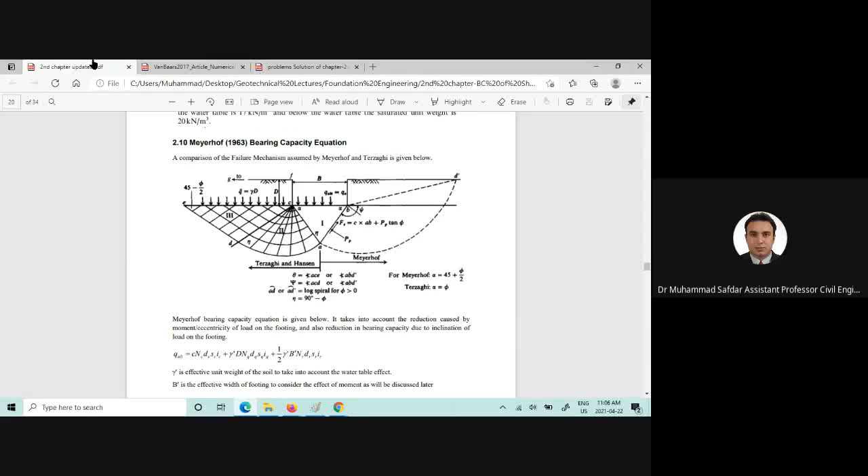About a very important topic related to foundation engineering, which is the Meyerhof bearing capacity equation, or the Meyerhof bearing capacity theory.

We discussed previously in our previous lecture Terzaghi's bearing capacity theory, but I will give you a brief overview of what we discussed in our previous class.

First, we started with understanding the ultimate bearing capacity of soils, which we defined as the least pressure which would cause shear failure in soils.

Then we moved towards understanding various modes of shear failures. For example, general shear failure, local shear failure, and punching shear failure.

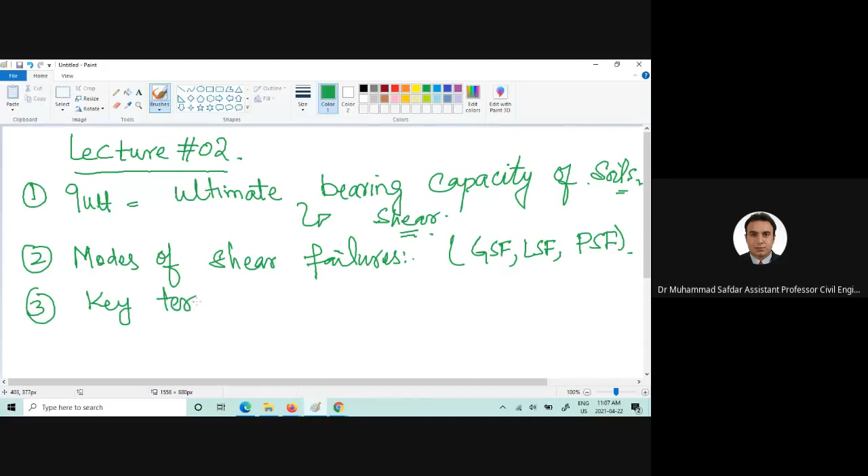Then we moved towards understanding the key terminologies related to the bearing capacity of shallow foundations. For example, we studied the gross pressure intensity, which we defined as weight of superstructure, weight of foundation, and weight of backfill soil, divided by the area of the foundation.

Then we moved towards the net pressure intensity, which was defined as Q gross minus Q, or we can also write that as gamma into D.

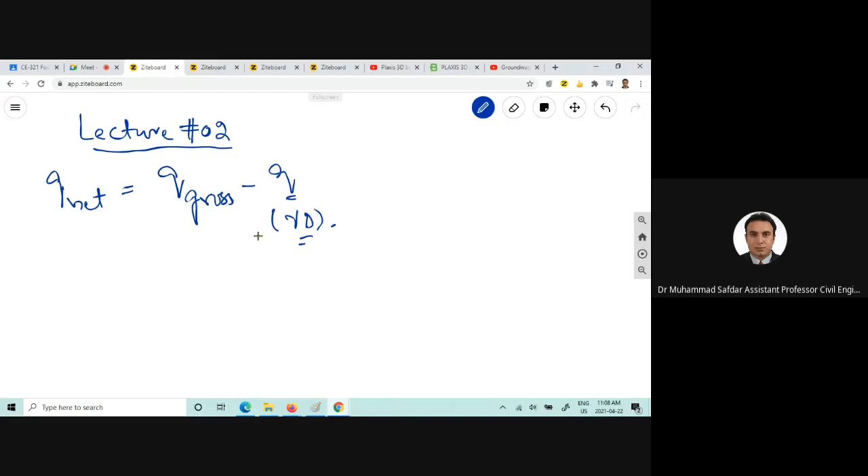Then we defined Q safe, which is basically the ultimate bearing capacity divided by the factor of safety. And factor of safety for shallow foundations, we usually take as 2.5 to 3, based upon various uncertainties in soils and the loading condition.

Then Q allowable was defined as the minimum of Q safe and the Q settlement criteria. This gives us Q allowable.

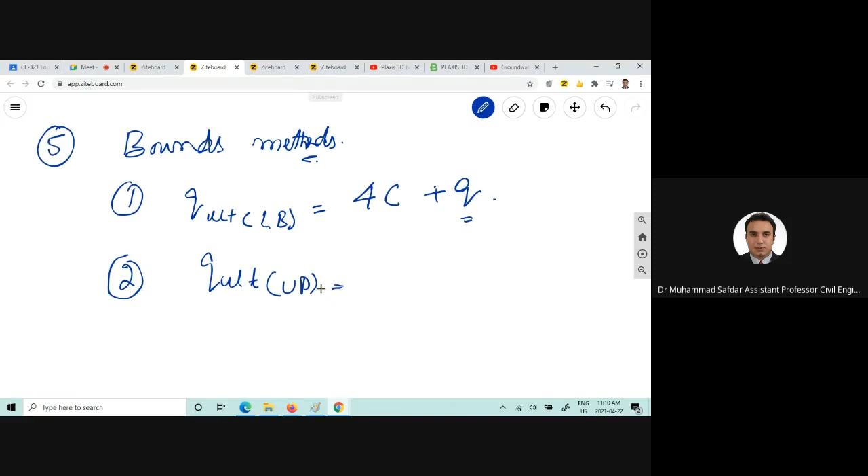After defining the key terminologies, we discussed the bounds method, and we discussed Q ultimate using the lower bound solution, which was 4C plus Q, and for the upper bound solution, it was 6.28C plus Q.

Then we moved towards discussing Terzaghi's bearing capacity theory, and we find out that we can write the Terzaghi's bearing capacity equation.

This part contributes due to the cohesion of soil. This part contributes to the ultimate bearing capacity of soil due to the overburden pressure exerted on top of the footing, and this part contributes due to the weight of soil.

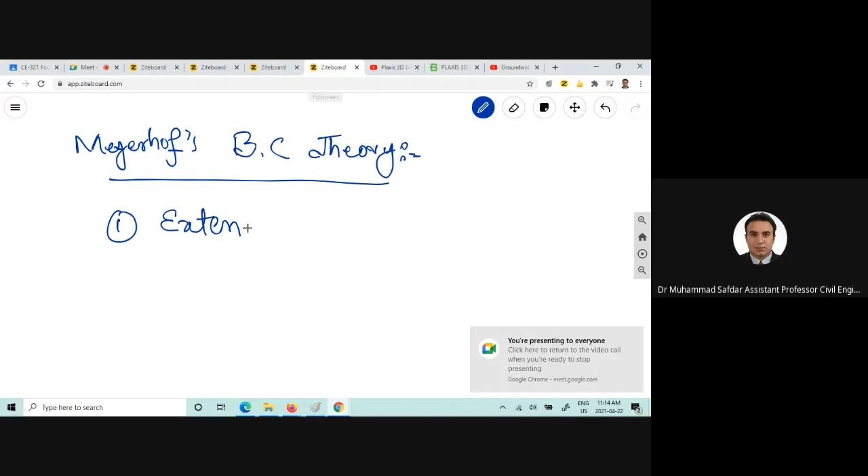Now, this is the failure mechanism for the Meyerhof bearing capacity equation or theory. So we were discussing about the extension. So this is the extension of Terzaghi's bearing capacity theory.

And it accounts for the moment, or eccentricity, and also for the load inclination effect.

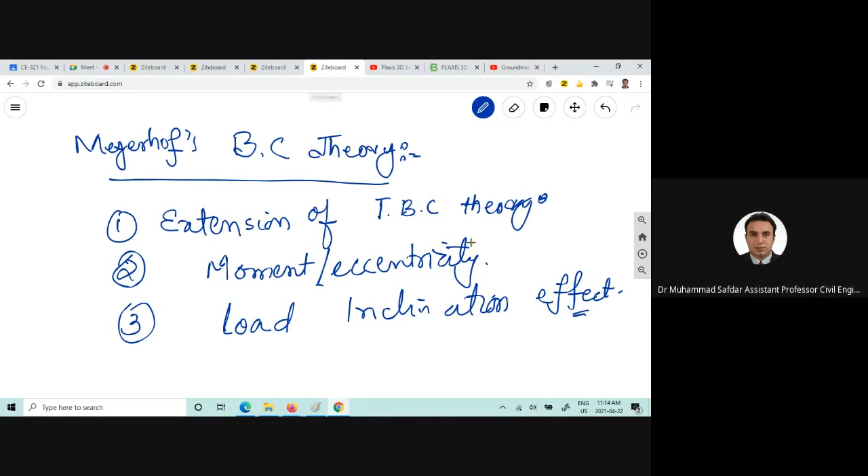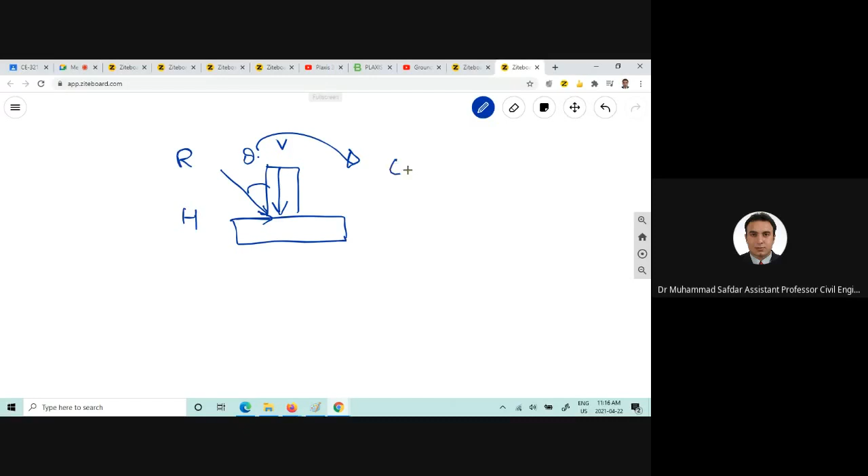Similarly, if there is a vertical load, or we call that V, and we are exerting horizontal load as well onto the foundation, there will be a resultant which will be acting at a certain theta, and that theta is known as the inclination angle. Basically, these moments and the inclination will reduce the bearing capacity of soils. So these effects were taken into account by the Meyerhof bearing capacity theory.

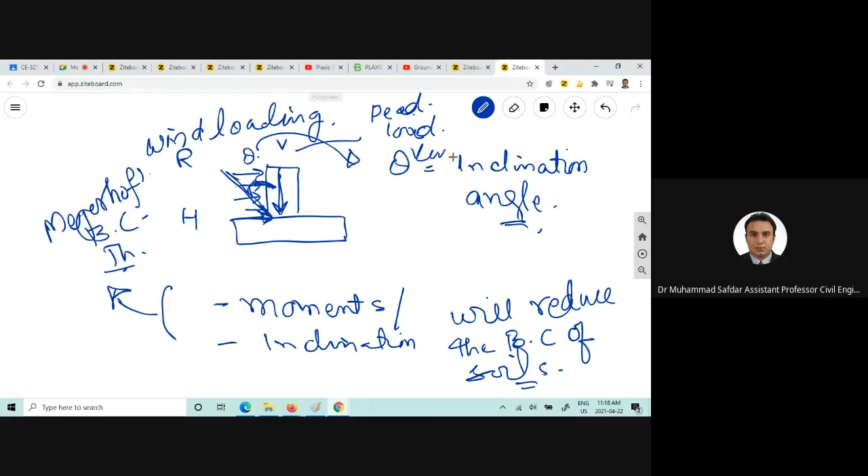Now here we are given the two mechanisms, failure mechanisms.

This one is the Terzaghi's bearing capacity theory failure mechanism, and this one is the Meyerhof bearing capacity theory failure mechanism. Now there are few differences here.

For example, in case of Terzaghi's bearing capacity theory, this alpha was equal to the friction angle, which we usually derive or get from the direct shear test or the triaxial test.

However, in case of the Meyerhof bearing capacity theory derivation, you need to consider that this angle alpha is equal to 45 plus phi by 2.

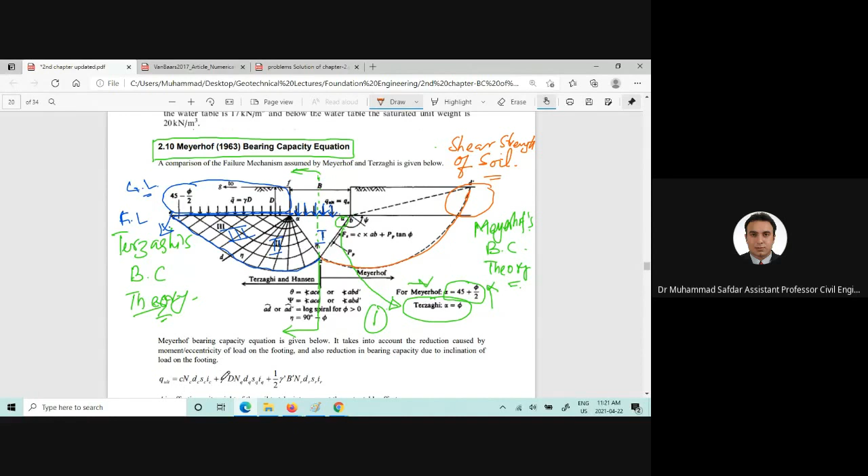Now, this is the bearing capacity equation. Don't get frightened by the length of the equation, because the basic equation remains the same. If you see here, so it's the C and NC, Q and NQ, half gamma B prime into N gamma, and D, S and I.

D represents the depth factors, DC, DQ and D gamma represent depth factors. SC, SQ and S gamma represent the shape factors. IC, IQ and I gamma represent the inclination factor.

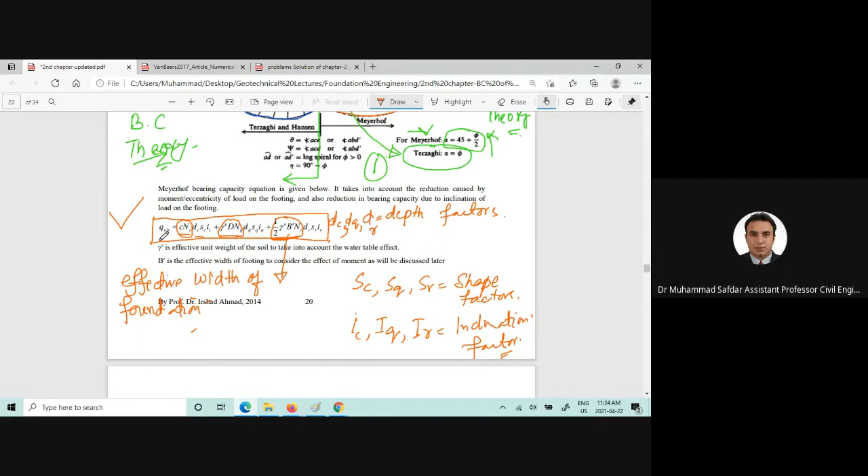And please also note down the equations to find out the bearing capacity factors, the shape factors, and the inclination factors, because we are going to use all these equations somewhere in solving exam problems or the assignments problems and numericals.

Okay, now these are the bearing capacity factors and these are the shape factors, and you can clearly see that Kp is the lateral pressure coefficient in case of the passive condition, and that is equal to this equation. B prime and L prime, these are the effective width of the foundation and effective length of the foundation, which we are going to discuss in the coming few minutes.

Now, depth factors can be found out using these equations, where D is the depth of foundation. These depth factors account for the increased bearing capacity of the foundation at greater depth. Now, additional strength is provided by the soils above the level of the foundation.

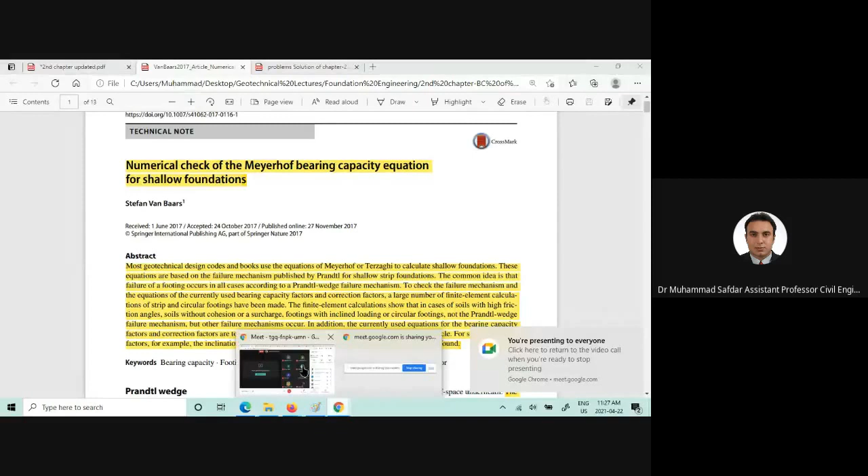Whenever you do research, whenever you perform a model test, for example, if you are performing a frame structure, that would be related to structural engineering, and we bring it to the shaking table, and then we investigate the dynamic effect and how much damage that structure experiences, and then we write a research paper and comment on what happened at what cyclic loading or frequency levels. Similarly, in bearing capacity equation derivation, there is a history of how it started and who started the derivations and the failure mechanism. So here is a technical note. First of all, this is a technical note, which is a short paper compared to an extensive paper. Here is the journal where it was submitted, and all the information: it was submitted and accepted in 2017. Now here is the title of the research paper.

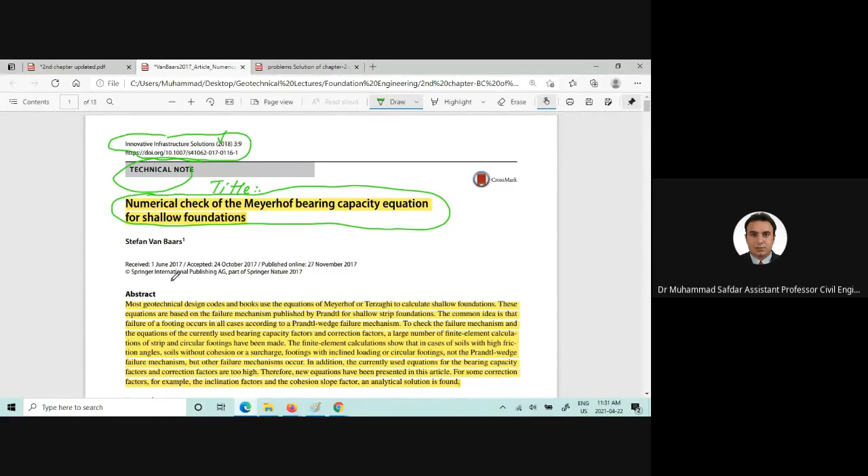The reason I am sharing this info is first related to the Meyerhof bearing capacity equations, and it's helpful for enhancing your knowledge on bearing capacity equations. The other objective is for those interested in performing numerical studies on shallow foundations, or even physical model studies where we test models and then do numerical simulation as well. It can also help you find scholarships in geotechnical engineering, because if you do your FYP and pursue a masters in geotechnical engineering, international supervisors look at your CV very seriously since you've done research during undergrad in that field. That's why I'm sharing this.

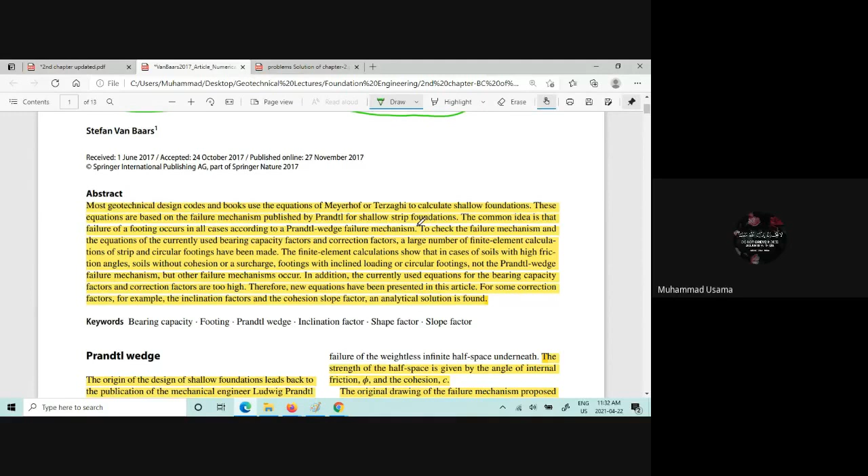The common idea is that failure of a footing occurs in all cases according to the Prandtl-wedge failure mechanism. Now you can clearly see that Prandtl was the researcher who started research on strip foundations. And if you remember, in case of Terzaghi's bearing capacity failure mechanism...

We were told that this part is the elastic wedge, and then there is a radial shear zone. In fact, Terzaghi named that radial shear zone also as the Prandtl zone, because he was so impressed by his work that he dedicated this zone to Prandtl.

To check the failure mechanism and the equations of the currently used bearing capacity factors and correction factors, a large number of finite element calculations of strip and circular footings have been made.

Now, finite element calculations - so it's an FEM software, and the name of that software is Plaxis, available in 2D and 3D, where you can perform bearing capacity analysis for shallow and deep foundations, and which is used in North America in consultancy firms as well, as I mentioned earlier related to GeoStudio. That is another software widely used in the industry.

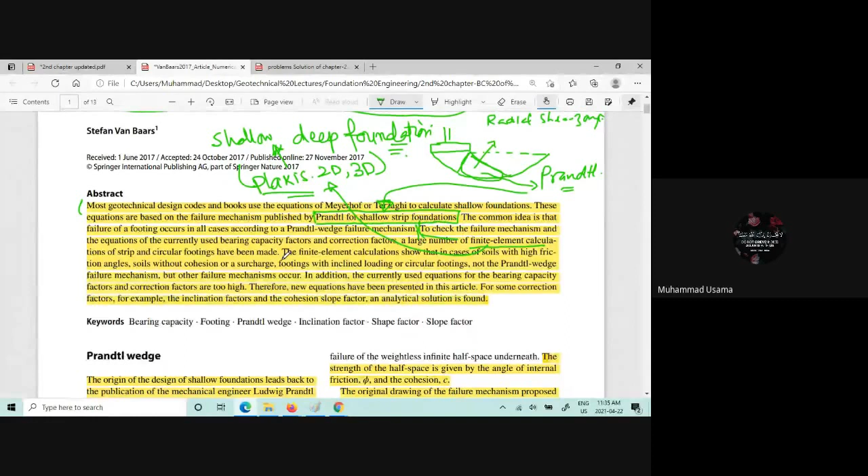The finite element calculations show that in case of soil with high friction angles, soil without cohesion, surcharged footings with inclined loading, or circular footing, not the Prandtl-wedge failure mechanism but other failure mechanisms occur. In addition, the currently used equations for the bearing capacity factors and correction factors are too high. Therefore, new equations have been presented in this article. For some correction factors, like the inclination factors and the cohesion slope factor, an analytical solution is found.

Okay, thank you. Now, this research is conducted in 2017, so fairly recent I would call it, and they are evaluating strip foundations and circular footings here. They are working using FEM analysis, and commenting on the very fundamental concept of the Prandtl failure mechanism for cohesive and cohesionless soils. So that's how the research is done.

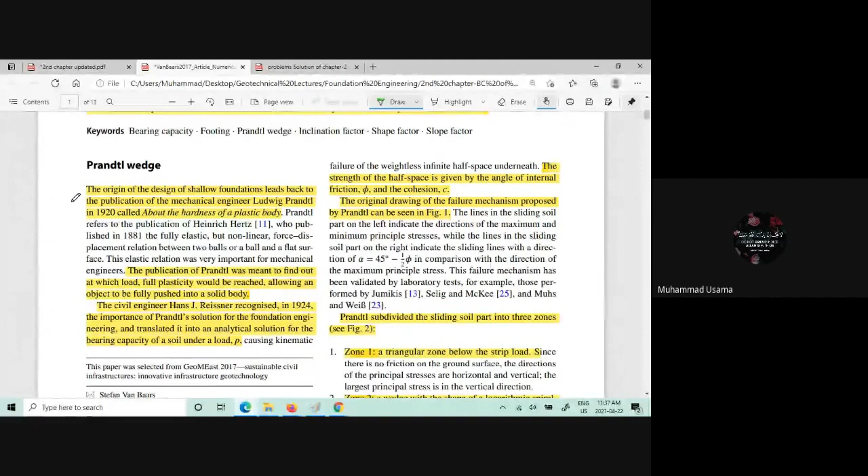Now the Prandtl wedge, please, the origin. The origin of the design of shallow foundation leads back to the publication of the mechanical engineer Ludwig Prandtl in 1920, called 'About the Hardness of a Plastic Body.'

The publication of Prandtl was meant to find out at which load full plasticity would be reached, allowing an object to be fully pushed into a solid body. The civil engineer Hans J. Reissner recognized in 1924 the importance of the Prandtl solution for foundation engineering and translated it into an analytical solution for the bearing capacity of a soil under a load P.

Thank you very much, Usama. Now you can see there is another researcher who came up here, and he also presented the analytical solution for the bearing capacity of soil under a load P. He also considered the strength of the soil as the angle of internal friction phi and cohesion C.

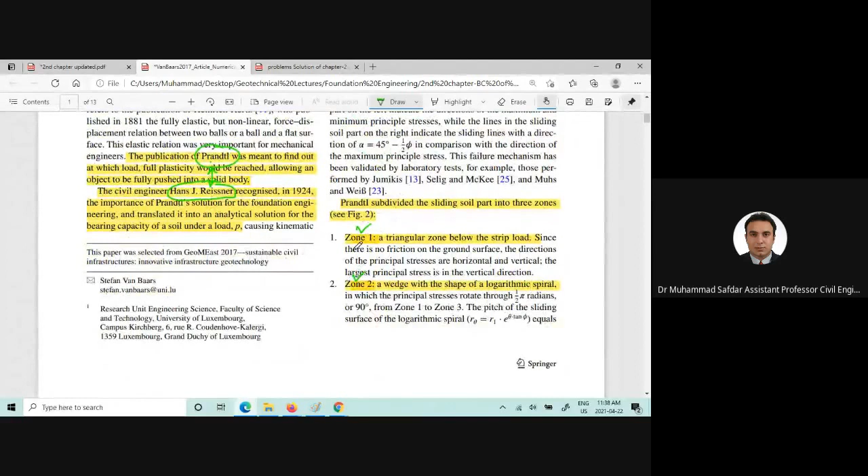The original drawing of the failure mechanism proposed by Prandtl can be seen in the figure, showing those three zones: the elastic zone, and the Prandtl zone or radial shear zone.

This is the failure mechanism proposed by Prandtl, and how he derived the equation for the ultimate bearing capacity. In fact, it was Terzaghi who did that.

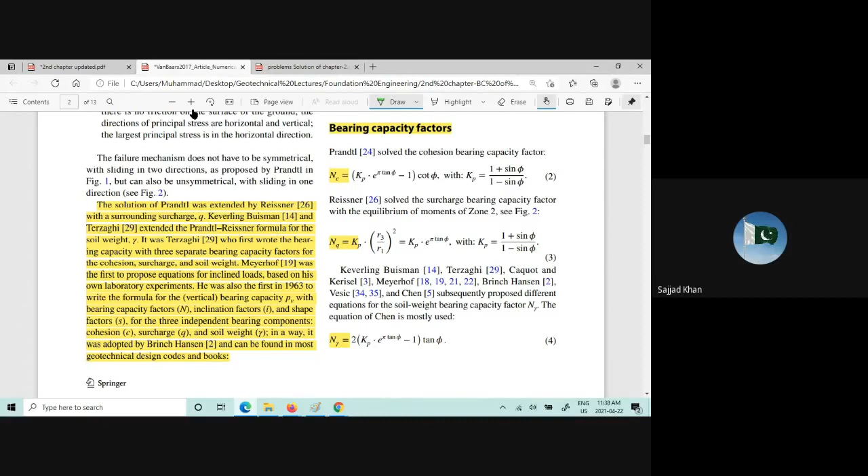The solution of Prandtl was extended by Reissner with surrounding surcharge Q. Keverling Buisman and Terzaghi extended the Prandtl-Reissner formula for the soil weight gamma. It was Terzaghi who first wrote the bearing capacity with 3 separate bearing capacity factors for cohesion, surcharge, and soil weight.

Now for today's lecture we go to Meyerhof. He was the first to propose an equation for inclined load based on his own laboratory experiments. He was also the first, in 1963, to write the formula for vertical bearing capacity PV with bearing capacity factor N, inclination factor I, and shape factor S for the 3 independent components cohesion C, surcharge Q, and soil weight gamma. This was later adopted by Brinch Hansen and can be found in most geotechnical design codes and books.

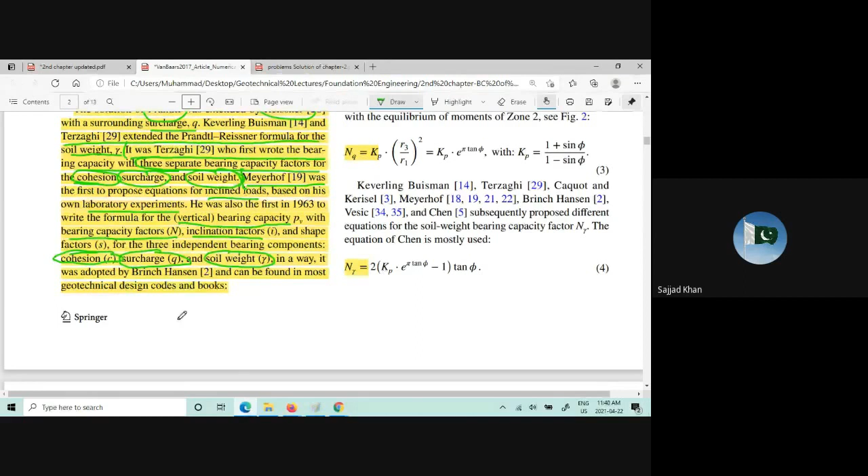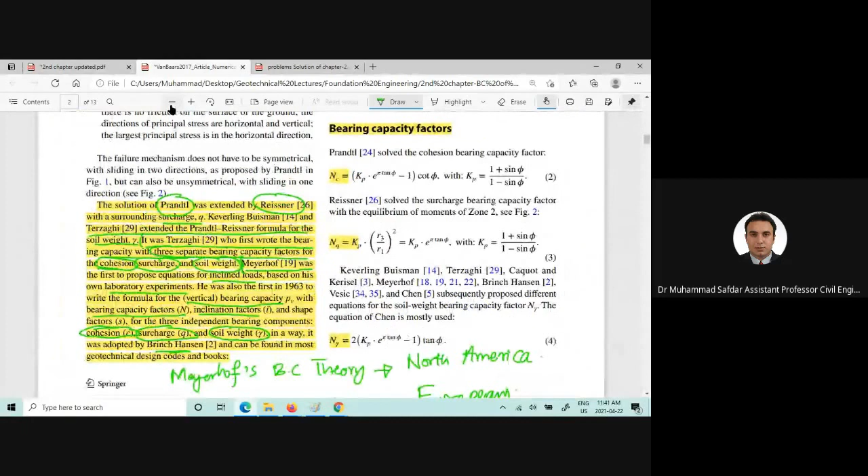Meyerhof's bearing capacity theory is used, or known by his name, in North America. However, Brinch Hansen, in the 1960s and 70s, proposed modifications for sloping ground. So in Europe they call it Hansen's equation or bearing capacity theory, because he modified it. But the concept behind these derivations remains the same: it started from Prandtl, Reissner, Terzaghi, Meyerhof, and then Brinch Hansen.

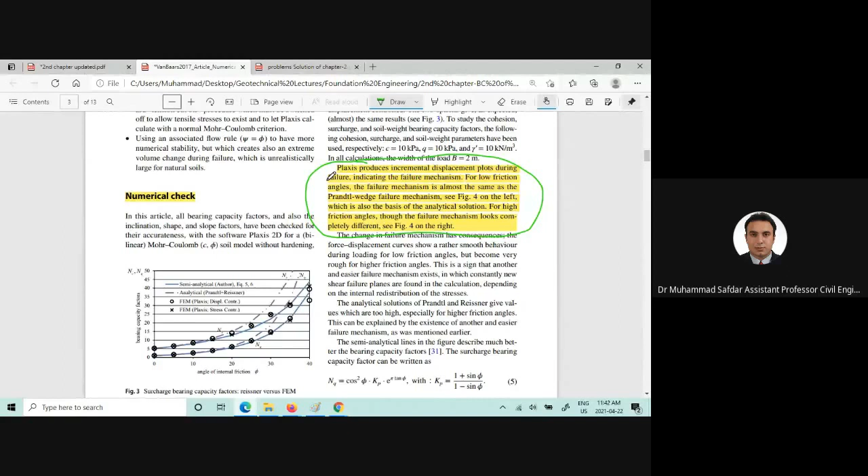There is also Vesic for the case of sloping foundations, who proposed different bearing capacity factors. Coming back to the research paper, he used these bearing capacity factors and compared them with Plaxis software. He did the numerical check, plotted and investigated the load-displacement curves, and plotted the angle of internal friction against the bearing capacity factors to see how increasing friction angle affects them.

You can clearly see that three different types of zones appear if you perform this analysis using Plaxis 2D software, which is very powerful for anyone interested in geotechnical engineering.

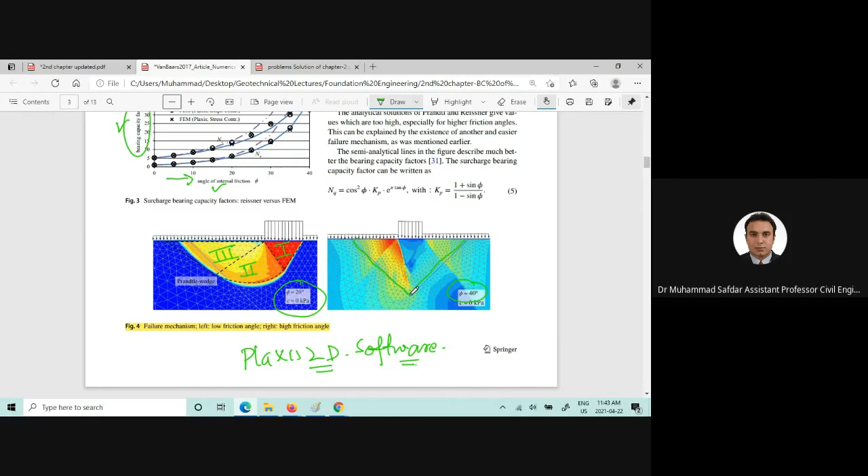The researcher shows that for phi equal to 20 degrees and cohesion equal to 0 kilopascal, you see a clear Prandtl wedge failure mechanism. However, when the soil density increases, the friction angle increases, and you only see an elastic wedge in the case of high frictional soil.

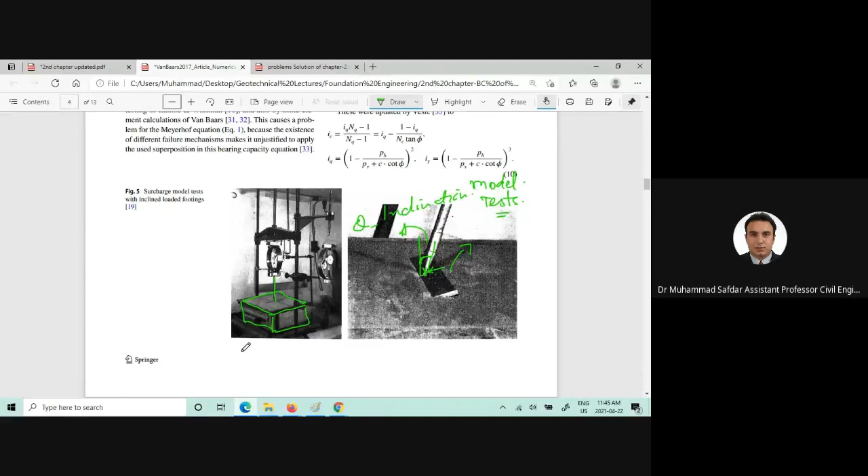First of all you learn a lot of things, because if you work on bearing capacity you can also contribute to design. If you want to prepare or fabricate physical models, people will notice that this person is doing research in geotechnical engineering, which is in itself a unique field, currently at the Department of Civil Engineering.

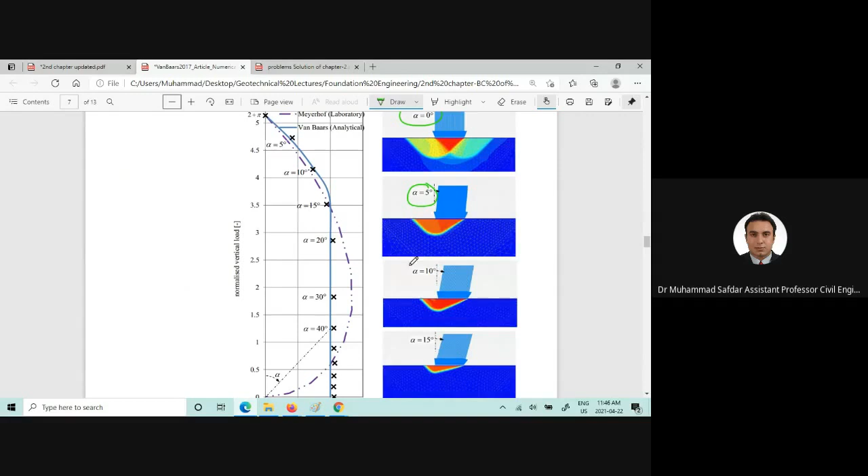That's related to the inclination, and for inclined loads, Mohr circles, we are going to use these concepts, and the shape factors as well, different shapes of foundations. If the inclination angle is 0 degree, 5 degrees, we can prepare these models. I can support financially if you want to prepare these models. That's also possible, you don't need to worry about that.

Shape factors, you will use these shape factors, and then you will notice how the failure mechanism for circular areas, for a rectangular footing, for a square footing will change beneath the foundation. You can clearly see significant stresses are applied near the foundation, and as you move below the foundation, the stress intensity decreases. Also, the friction angle characteristics: if friction angle is 0, for cohesive soils, and if we have purely frictional soils or the internal friction angle is very high, then how the failure mechanism would occur.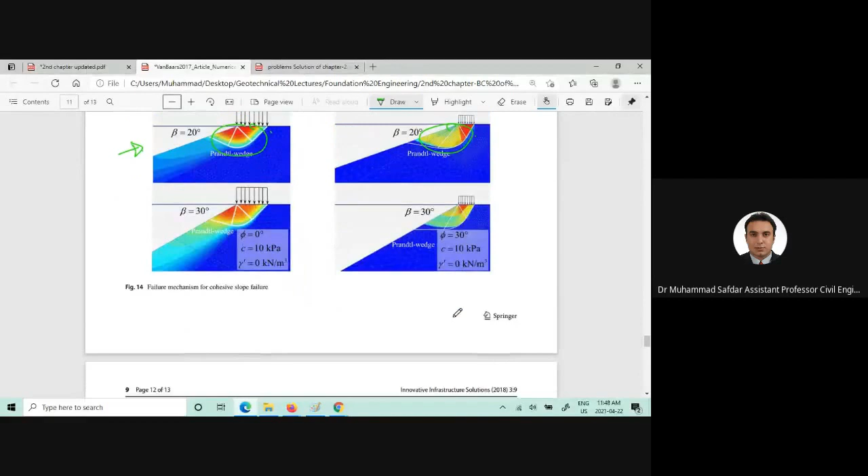Okay, the third volunteer. Who is the third volunteer? He or she needs to help me with the conclusions, please. Yes sir, name please. Amna Khan. Okay, thank you, please start with the conclusions.

A large number of finite element calculations of strip and circular footing on homogeneous soil have been made to check the failure mechanism and to check the currently used equations for the bearing capacity factors and the equations for the corresponding inclination factors and shape factors. Okay, so these are the factors which were investigated during this study. And slope factors: the finite element calculations show that the currently used bearing capacity factors are too high.

The most important reason for this is that for natural soil, the dilatancy angle is much lower than the friction angle. The finite element calculations also show that not in all cases does a Prandtl-wedge failure mechanism occur. In fact, in many cases, other failure mechanisms occur. This is one of the reasons why most of the currently used inclination, shape, and slope factors are not correct.

In many cases, the currently used correction factors are too high, so unsafe. Therefore, based on the finite element calculations, new equations have been presented in this article for some correction factors, for example the inclination factors and the cohesion slope factors, and an analytical solution is found.

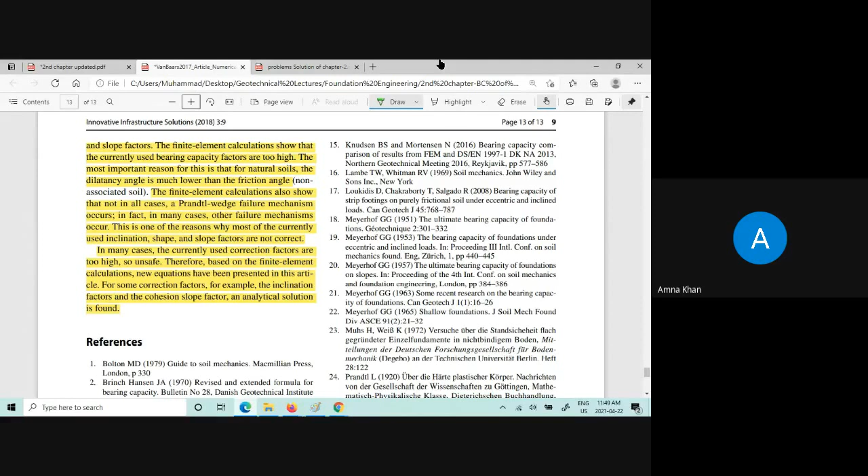Okay, thank you very much Amna. Now, these are the conclusions obtained based upon the numerical analysis, numerical modeling, and the physical model tests. Then you compare the data and you come up with the conclusion that you won't see the Prandtl-type mechanism for each and every soil, so there would be a difference. Now, how much that difference would occur, that is part of the research which we will do.

That is one project. There is another project which comes into my mind, which I also discussed with the chairman sahab, that I want to build a few geotechnical or soil mechanics demonstration models for the soil mechanics lab, and that would be a huge contribution because you are adding value to the soil mechanics lab. So this is one example.

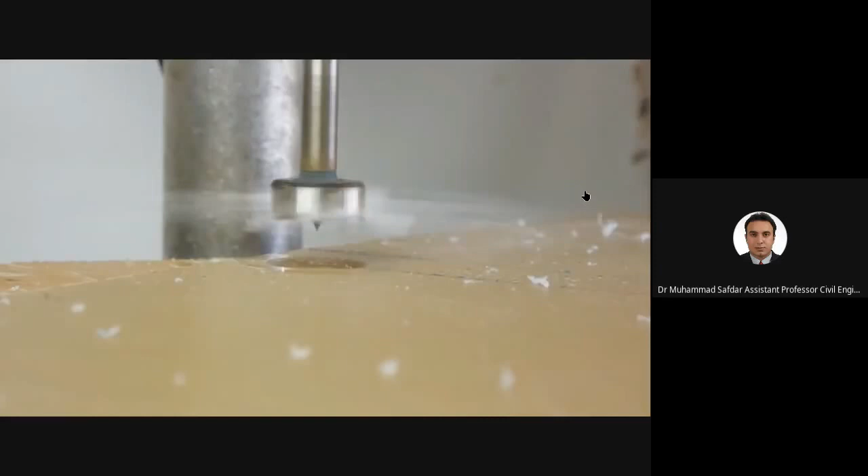Related to the flow lines and flow net. I will provide the finances for these models. Can you hear the voice in the video or not? No sir, no sir. Okay, now it stopped, but how about the earlier one?

So you studied about flow nets in Geotech 1. Now you got seniors, and now you need to contribute to the department. So if you remember, the flow lines occurred and the equipotential lines, you can draw them, and the water levels on the upstream side and the downstream side.

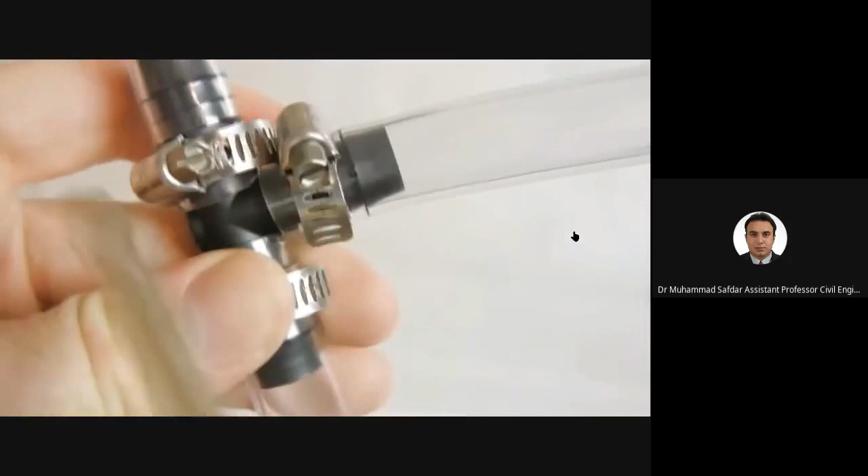Now if we place the sand there, and if we saturate it and add a kind of color there, then the flow lines or the water particles will move from the upstream side towards the downstream side. So we can use the glue there, the drainage and the inlet and outlet valves. Let's put the water inside. That tank is in acrylic glass.

You can put those potassium permanganates there, and you increase the head of the water on the upstream side. That differential head difference will cause the flow to occur from the upstream side towards the downstream side.

This is only one demonstration model which we will place at the soil mechanics lab. There are dam failure models, liquefaction models, and bearing capacity models as well. We can come up with approximately 7 to 10 models, and in your thesis you are going to explain the basic theory and mechanism occurring in this model.

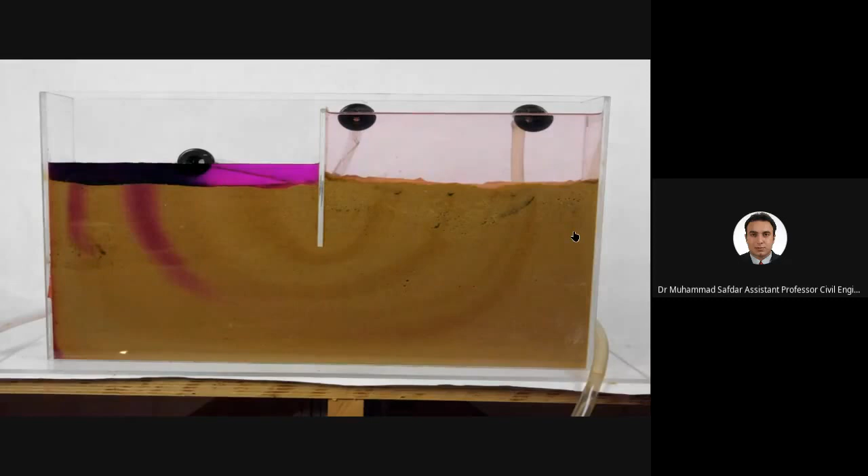This will refresh your concept related to geotechnical engineering, particularly for those students who have interest in geotechnical engineering. It will showcase your talent in front of the chairman, the honorable dean, and the vice chancellor, showing that we have made these models which cover the core concepts related to geotechnical engineering.

Furthermore, you can also send these videos to international professors and supervisors. I saw somewhere a video of the bearing capacity demonstration, but it went away. I thought maybe I'll find it so I can show you - that was another type of model I was expecting.

This is the kind of soil improvement technique. Oh no, you see those ads, funny ads.

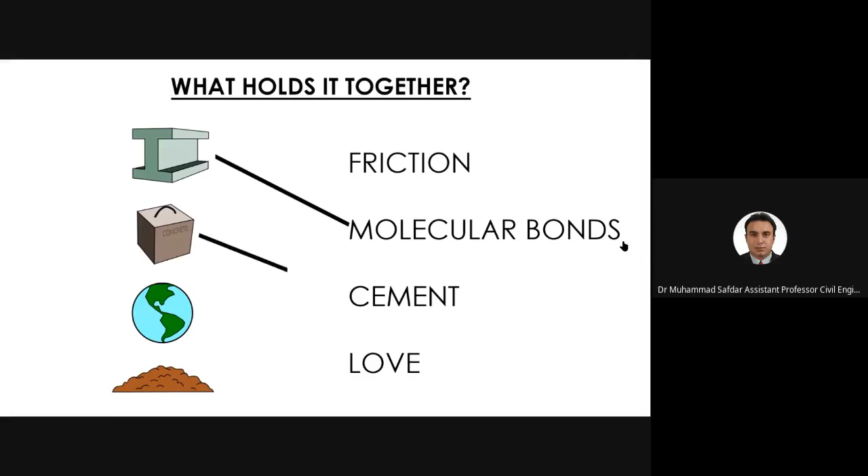If you load the soil, you will see the shear failure there. And if you provide some confinement, then it will hold.

Now you can see that if we have reinforced these soils with different layers like geotextiles and geogrids - there is also a model for the geogrid and there is also a model for the geotextiles.

You can make the videos, take the pictures, and include them in your final year project. Then you can present these videos during the FYP presentations and progress presentations, which will definitely help.

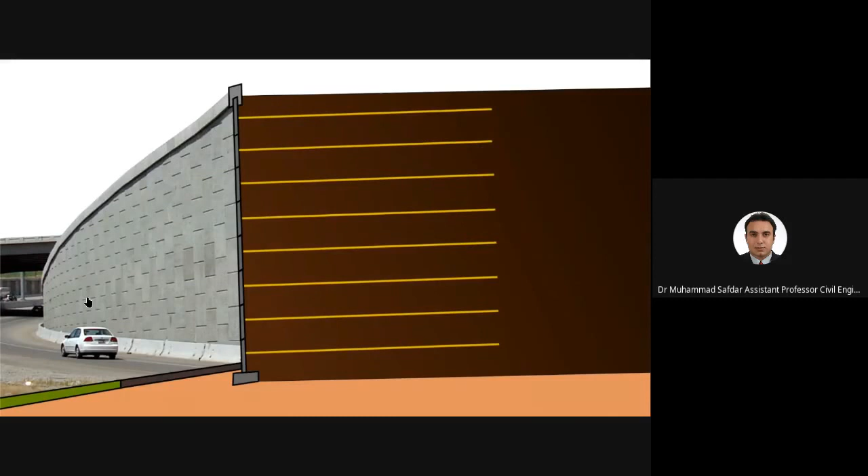Mechanically stabilized walls are there - in retaining walls these concepts are used. These type of mechanically stabilized walls which are located on motorways and highways are stabilized using the same concepts. All this information you can include in your thesis.

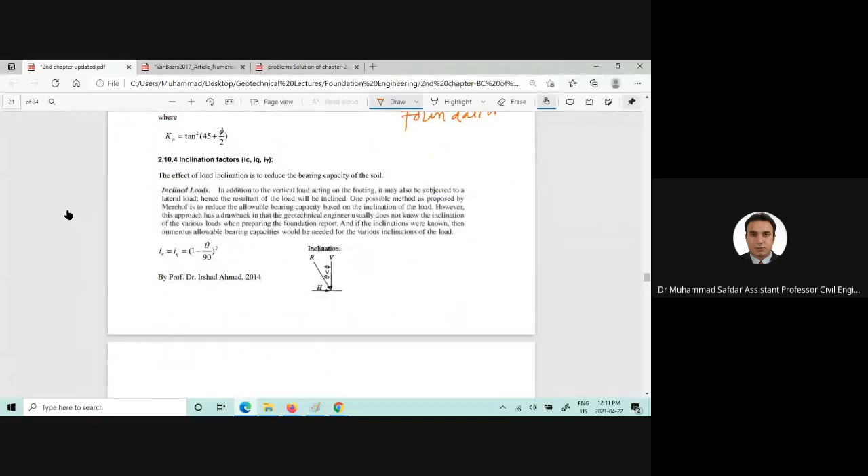That was related to the Meyerhof bearing capacity equation, how important it is, how the different depth factors, shape factors, and inclination factors are derived based upon research. These are the inclination factors, and how we can find out the inclination factors.

The difference between the Terzaghi's and Meyerhof bearing capacity approach: as we discussed, the shear failure mechanism is different. The introduction of Sq, which is the shape factor due to the surcharge, was introduced by Meyerhof.

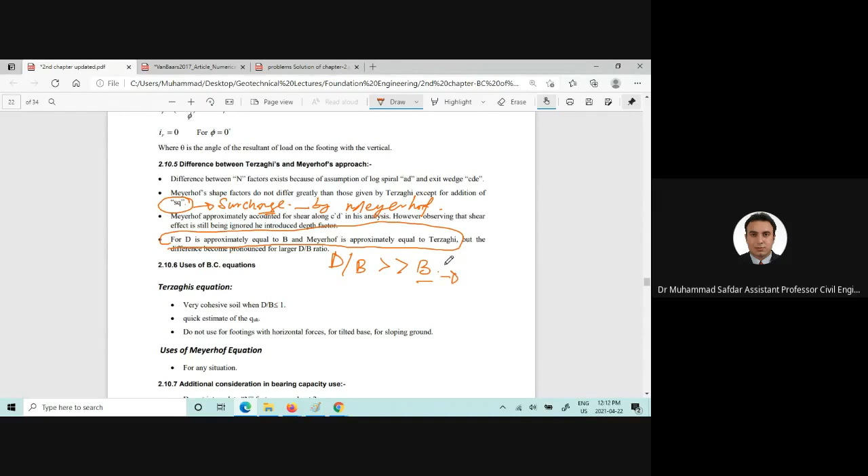For depth of the footing, if it is approximately equal to B, the Meyerhof and Terzaghi bearing capacity will give identical results. But if D by B is greater than B, then the results of both these theories would be different.

Terzaghi's equation is preferable in case of cohesive soil where we are having shallow foundations, and it can give us a quick estimate. As we know, horizontal forces, tilted bases, and sloping ground scenarios are not suitable for finding the bearing capacity using the Terzaghi's bearing capacity equation. However, in case of the Meyerhof equation, we can use it for any situation or scenario.

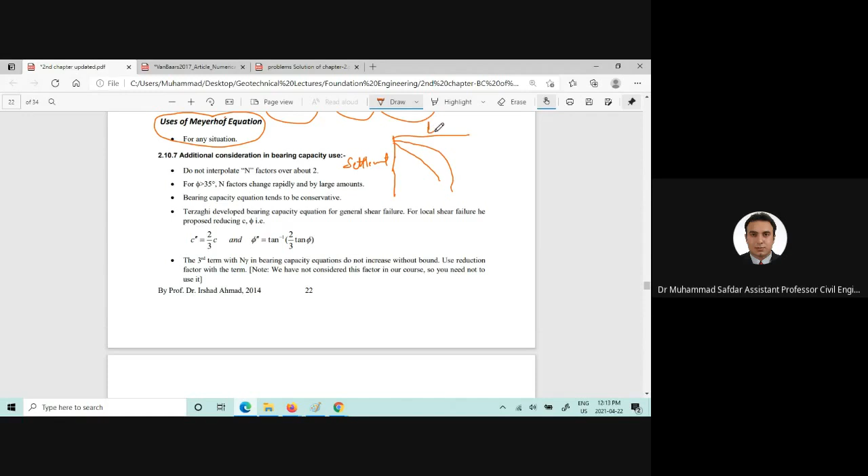Terzaghi bearing capacity uses the general shear failure mode of failure. In case of local shear failure, there are a few additional considerations: cohesion should be reduced by a factor of 2/3, and you can also multiply 2/3 into the tangent phi in order to account for local shear failure.

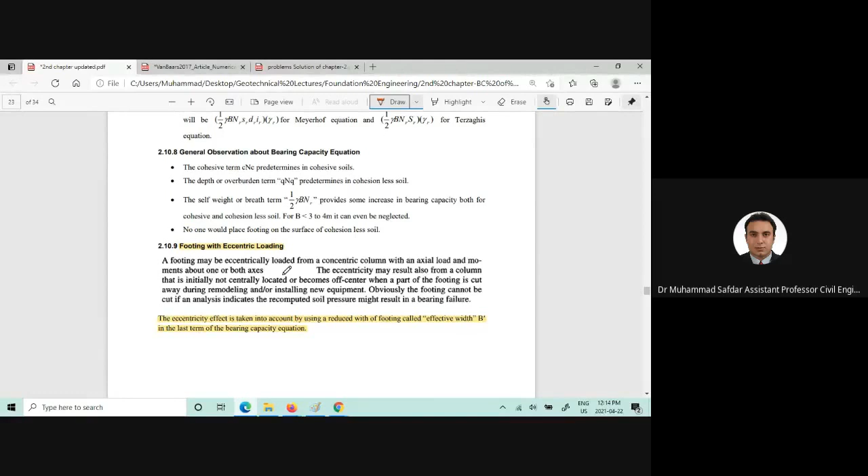Now, general observations about the bearing capacity equation. As we already discussed, the cNc part is predominant in cohesive soils, and the overburden part, Nq, is predominant in cohesion-less soils, like this one for clays and this one for sands. Self-weight of the soil is predominant for both cohesive and cohesion-less soils, and for B less than 3 to 4 meters, it can be neglected.

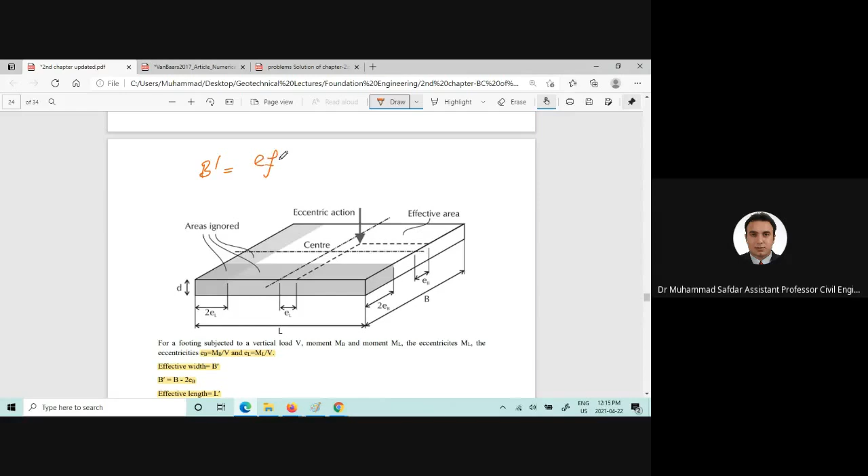Now there is an interesting concept which we touched on a little bit, the use of B prime, which is the effective width of foundation. For example, we are given with the foundation...

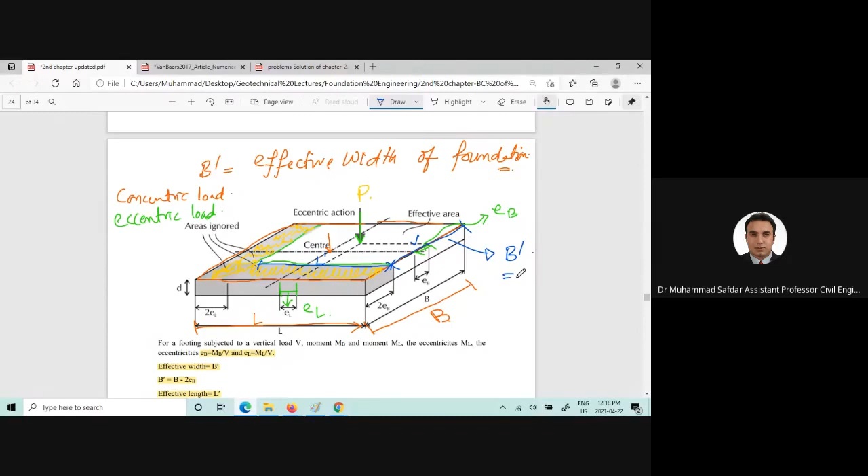Now we will come up with a new dimension of L prime. So this would be L prime, and let's suppose this one is B prime. Now if you want to find out EB, which is the eccentricity along the width of the foundation, we divide the moment by the vertical load, so this will give us the eccentricity in the direction of the width of the foundation. This would be the moment along the length of the foundation divided by the vertical load, which gives us the eccentricity if the vertical load is given.

Now if you want to find out B prime, that would be equal to B minus 2EB, and if you want to find out the effective length, it would be L minus 2EL, and I think we need to correct this equation in the notes. Then we come up with the effective area, and we can find out AF equals B prime into L prime.

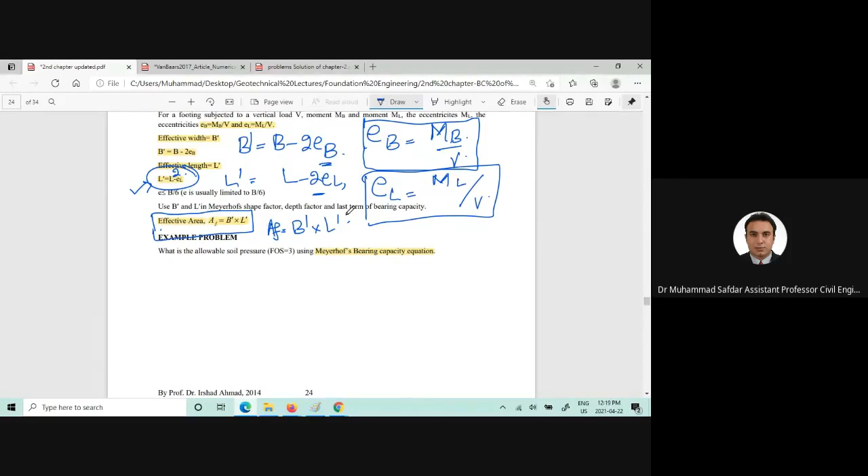We will solve these problems in the coming lecture. There is a separate lecture on solving the numericals where we are going to use all these equations, and I hope you will understand the concepts more clearly. Now, if an eccentric load is applied onto the foundation...

There is a load applied, and let me draw that. So this is the center of the foundation, and the resultant vertical load P is applied at a certain eccentricity E.

Then what would happen? Moments would be applied in this direction, and the pressures beneath the foundation would have a distribution something like that, which will give us Q prime and Q double prime, where Q prime is equal to the largest bearing pressure and Q double prime is equal to the lowest bearing pressure.

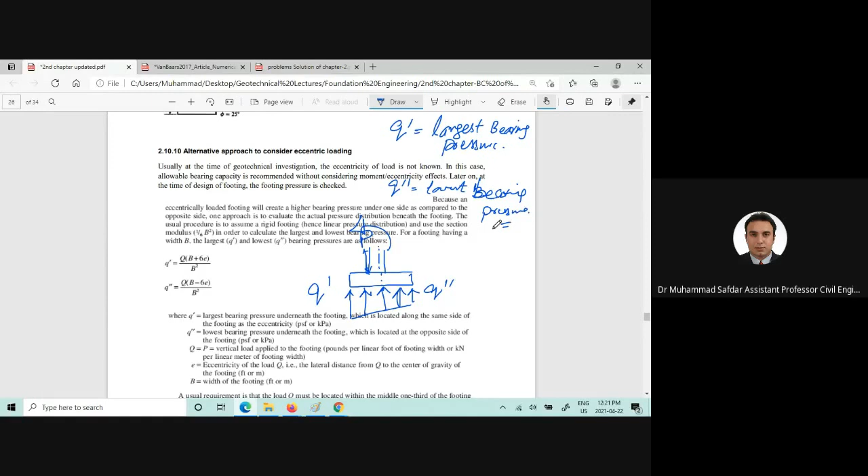E is the eccentricity from the central loading, and the questions and answers will be given a separate time at the end of this lecture. Please hold on to these questions. Now Q prime, Q double prime, Q, E and B are given here as well.

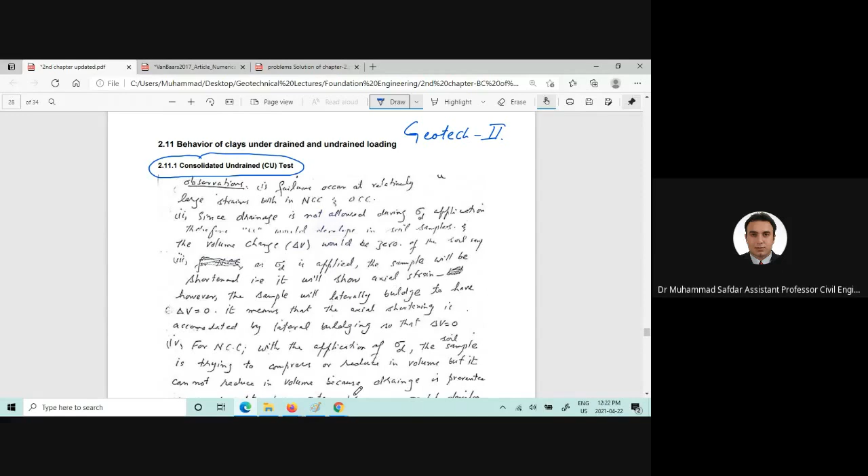Now, for the behavior of clays, for example drained and undrained loading, these concepts are related to Geotech 2. Now, for drained loading or consolidated undrained behavior, for normally consolidated clays and over-consolidated clays, what do you remember from the drained consolidated undrained behavior for normally consolidated clay and over-consolidated clay? Any thoughts related to the CU test on normally consolidated clay and over-consolidated clay would be appreciated.

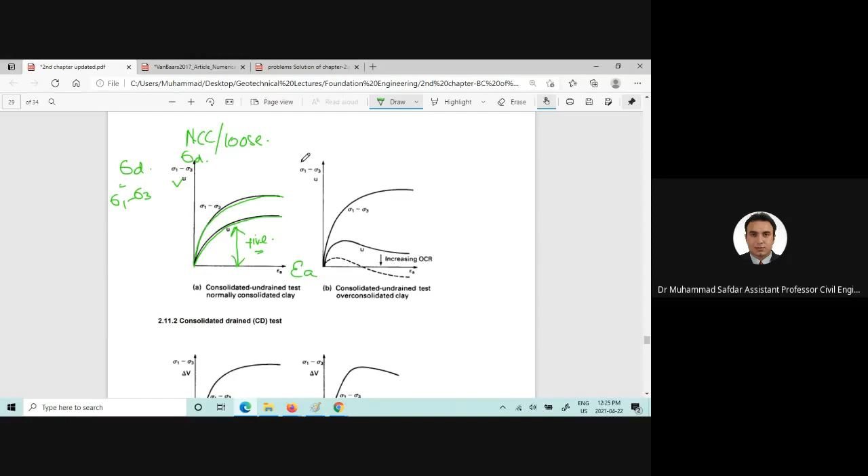Now if you want to draw for over consolidated clay or dense sands, this would be sigma D or epsilon A. The stress strain graph should look a little bit higher than the previous one, because that was for loose sand. And then there is a positive pore water pressure, then a decreasing trend will start with the dense sand, and after that there will be another.

For example, OCR is equal to 1, OCR is equal to 2, or OCR is equal to 3. This is the positive pore water pressure, and here we are getting the negative excess pore water pressure. In case of increasing OCR, the trend will go from compressive to dilative.

If you want to draw the sigma D and epsilon A curve in consolidated drained condition, we are now talking about volumetric changes. The stress strain graph will look somewhat like this, and it should go beyond that because it's for normally consolidated clay or loose sand, but here only the concept of dilatancy or volumetric change is shown, and we can clearly see that the peak in the dense sands occurs at small strains.

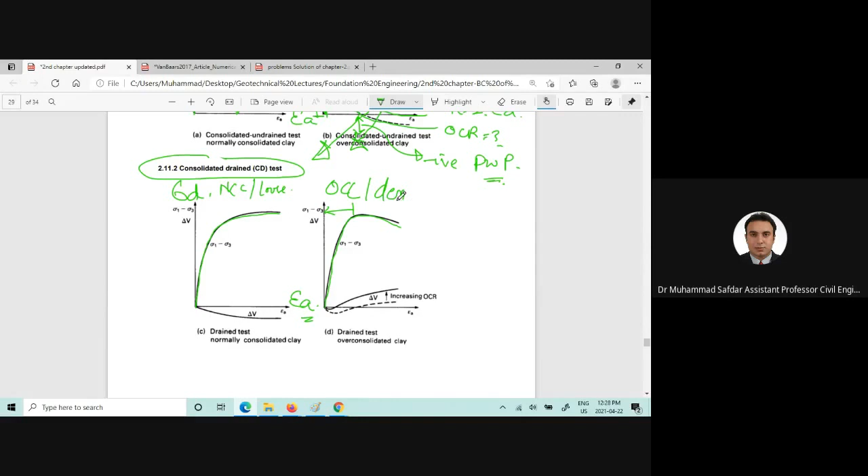For OC clay or over consolidated clays and dense sands, the observations were made, which were discussed in good detail in class as well and in the exams. We also touched a little bit about the total stress analysis and the effective stress analysis.

Now in case of sands, we do total stress analysis or effective stress analysis. We do effective stress analysis, and that is also known as the long-term analysis, and that is also known as the drained analysis. Now in clays we do...

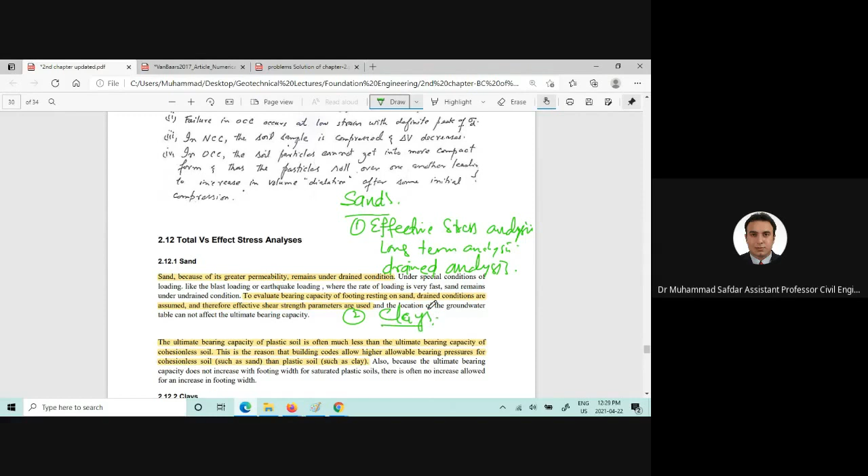Now in clays we do the short-term and long-term analysis, because we are also given with normally consolidated clays and over consolidated clays, and in over consolidated clays negative pore water pressure will occur, and we need to provide sufficient time to equalize this negative pore water pressure, because this negative pore water pressure is giving added strength to the soil. So therefore we need to do the long-term or drained analysis or effective stress analysis in case of OC clays.

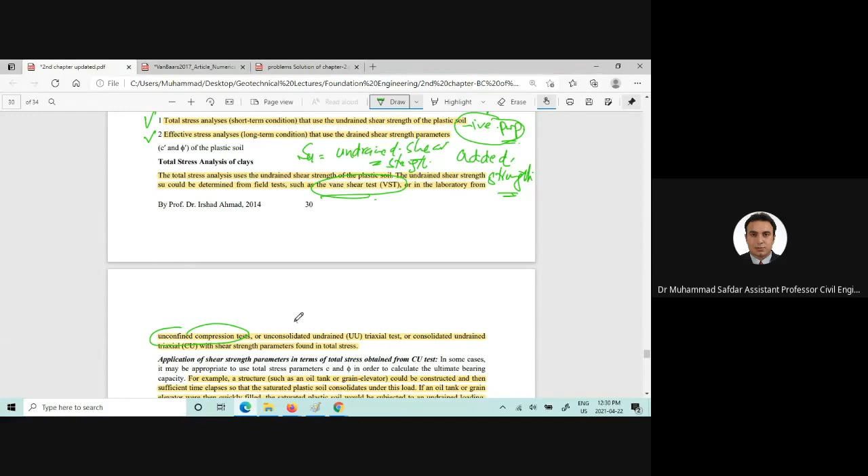Information is given here that we need to perform total and effective stress analysis, and how we perform the undrained shear strength of the soil, Su. The undrained shear strength of the soil can also be obtained from the vane shear test, unconfined compression test, unconsolidated undrained test, triaxial test, and different types of triaxial tests, CU tests. Now an example is presented here as well, as we discussed in the Geotech 2 course.

Regarding the examples for different types of tests and the field application, here is the oil tank, and here we are given with the grain elevator, where we can store the grains. For example, if we empty this tank, here we are given with the saturated soil beneath the foundations, and here also we are given with the soil beneath the foundation.

So if we empty these grains out of this tank and the oil out of this tank, and then fill it, this oil has already consolidated the soil beneath the foundation. Now suddenly emptying this elevator or tank and then refilling with the oil and refilling the grains into the elevator will cause the consolidated undrained test, because it was consolidated initially. Now we are adding extra load on top of this tank or the soil, and that is in undrained condition.

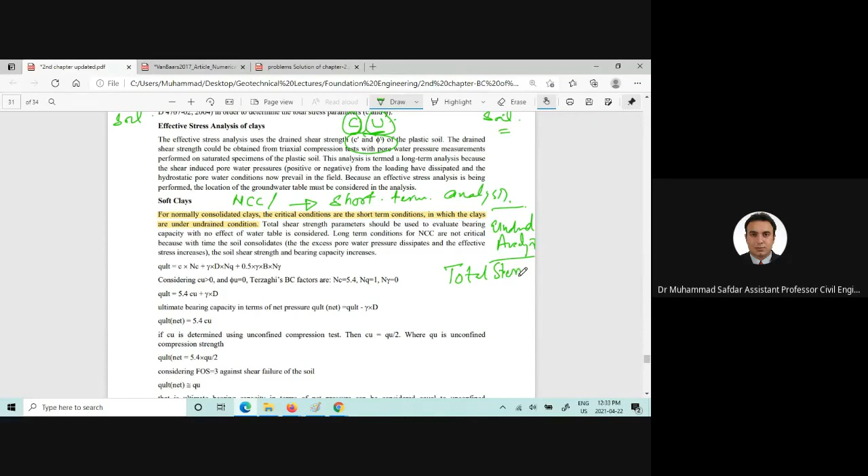If we remember, for phi equal to 0, solving Terzaghi's bearing capacity equation, we come up with an equation that gives us Q ultimate net is approximately equal to the qu of this soil.

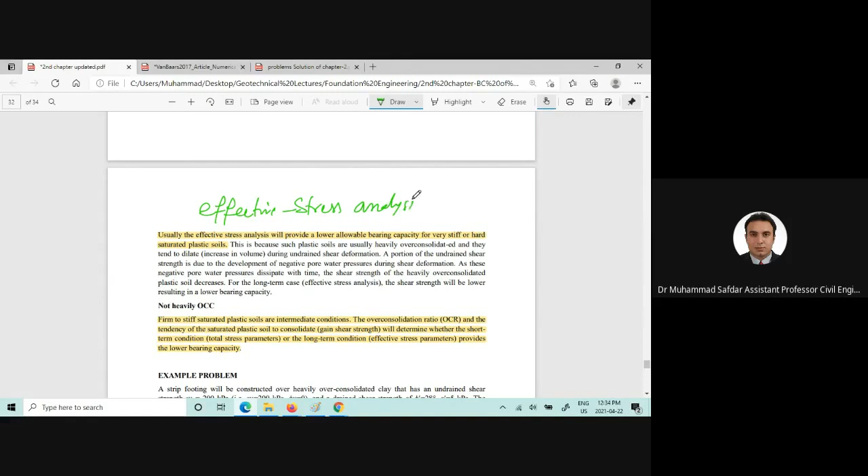For heavily over-consolidated clays, we need to perform effective stress analysis, because of the negative excess pore water pressure generated, which adds to the shear strength of the soil. For lightly over-consolidated clays, we need to do both total stress analysis and effective stress analysis.

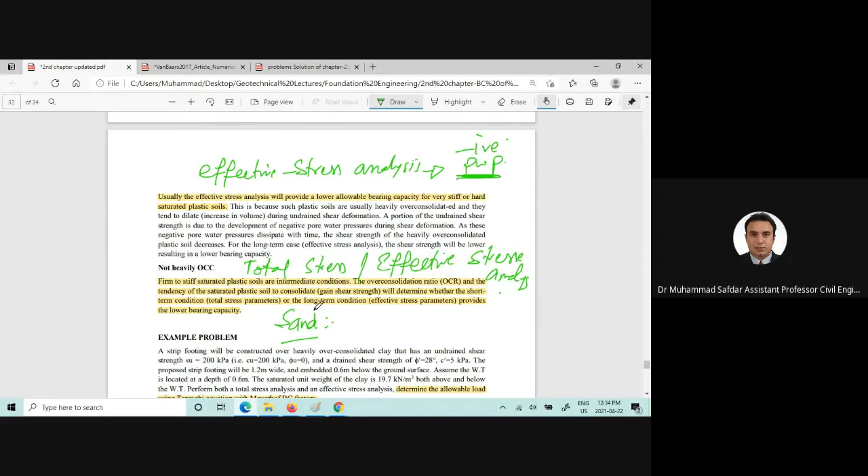One thing to mention: for sands, we sometimes do undrained or short-term analysis as well, but whenever there is blast loading or earthquake loading in sands, this can cause liquefaction. One model explains liquefaction in sands, which is also related to Mirpur sand, because Mirpur embankments liquefied during the recent earthquake.

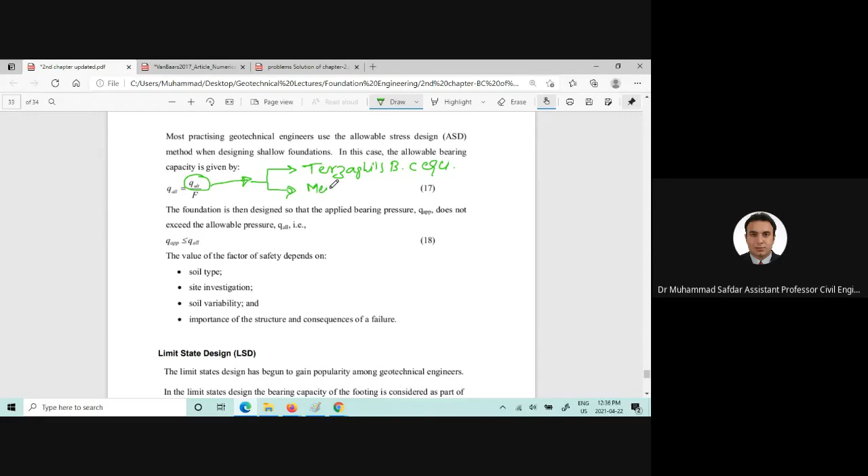Now going towards the design philosophies, there are two design philosophies. One is the allowable stress design philosophy, which we already discussed, where we find out Q ultimate using Terzaghi's bearing capacity equation, and we can also find it using Meyerhof's bearing capacity equation or theory.

We use cohesion and friction angle, the shear strength parameters, and these parameters we find out from various lab and field tests. Sampling disturbance, collection, and apparatuses definitely play a huge role in getting the ultimate bearing capacity of the soil.

Now, to find Q allowable, we use a factor of safety of 2.5 to 3, and based upon all the uncertainties, we apply the lumped factor of safety. We divide Q ultimate by the factor of safety and get Q allowable. Now there is applied load on the foundation, and the allowable stress design says that Q applied should be less than or equal to the allowable bearing capacity of the soil.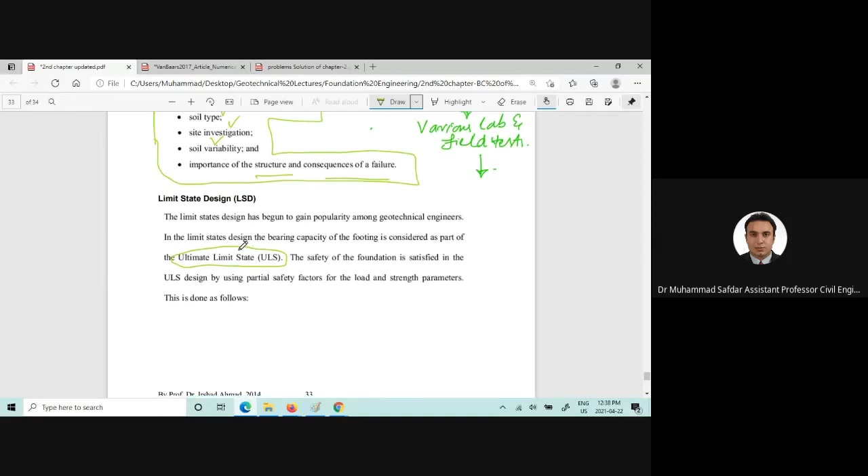There is also another foundation design philosophy known as the ultimate limit state. In the ultimate limit state, we apply partial factors to the load and to the shear strength parameters. Loads are multiplied with factors recommended by different building codes to get the factored applied pressure, and if we divide this factored load by the base area of the footing, we get the factored applied pressure.

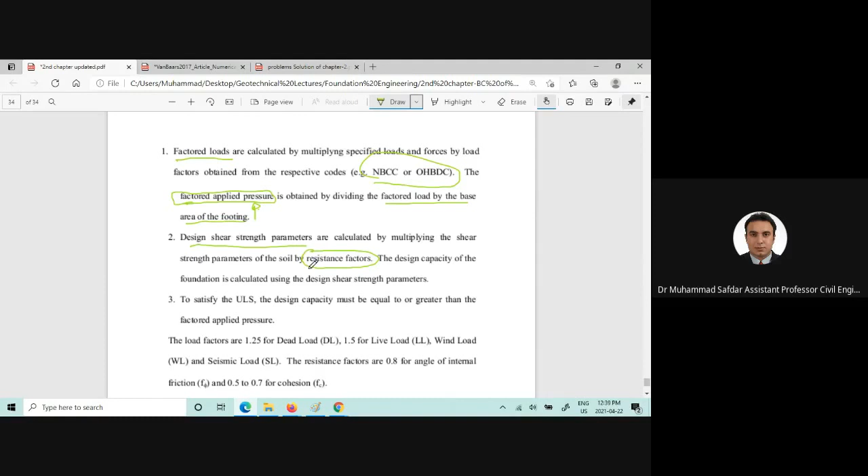Design shear strength parameters are calculated by multiplying the shear strength parameters of the soil by resistance factors, which reduce the shear strength parameters. For example, load factors are 1.25 for dead load and 1.5 for live load, wind load, and seismic load. It means dead load is increased 25%. Whatever the structural engineer calculates as dead load, you increase that by 25%, and 50% you increase for the live load, wind, and seismic loads.

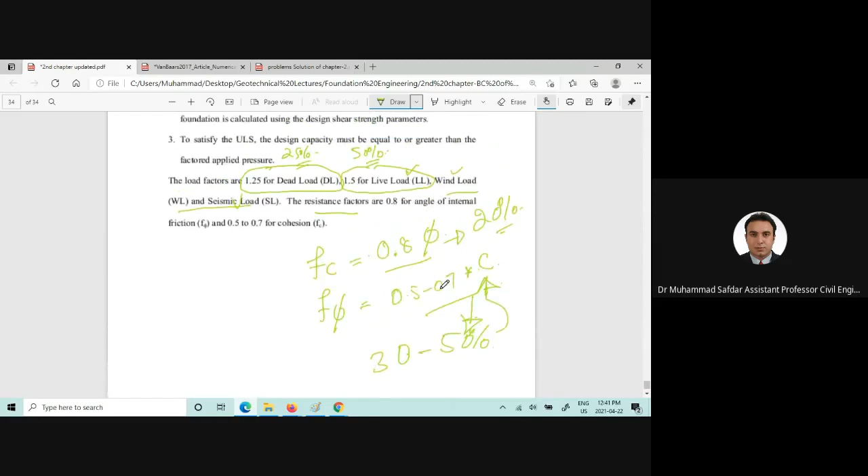Now, the design capacity based upon the ultimate limit state should be greater than or equal to the factored applied pressure. That is the philosophy related to the ultimate limit state.